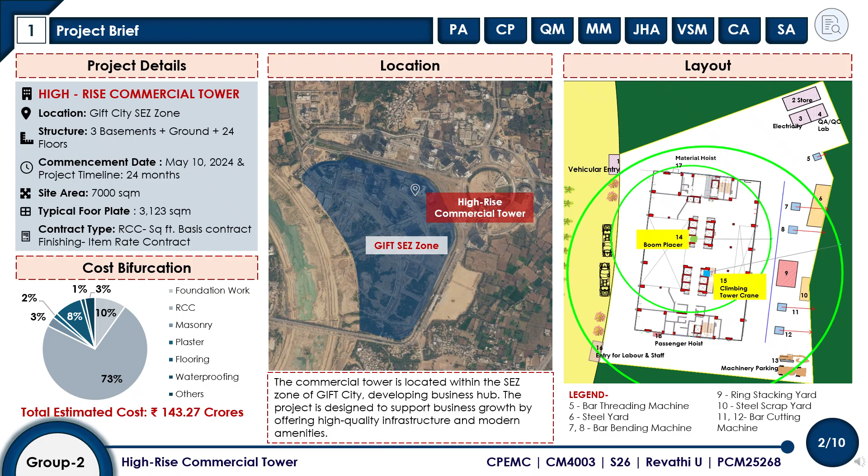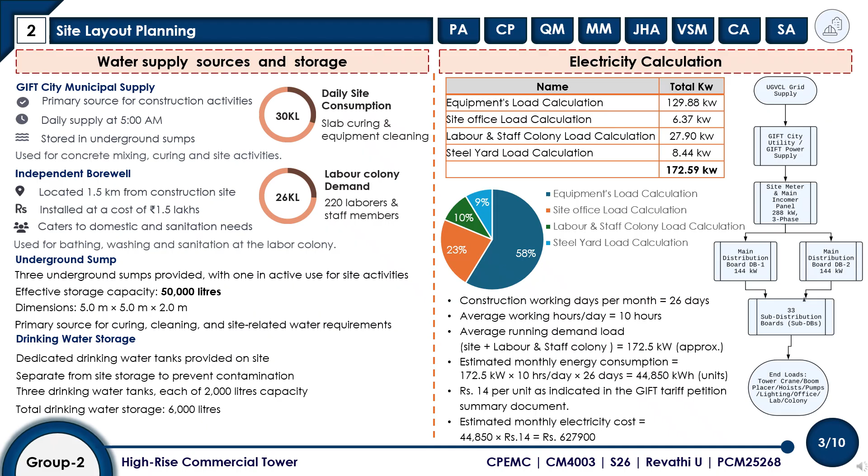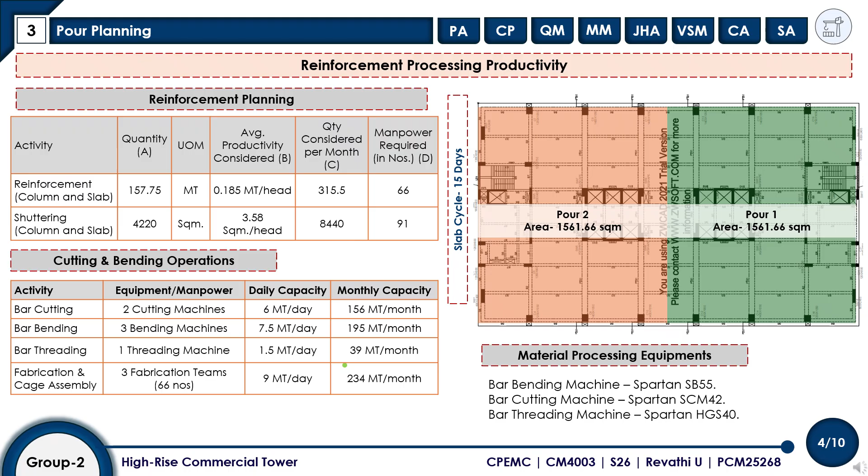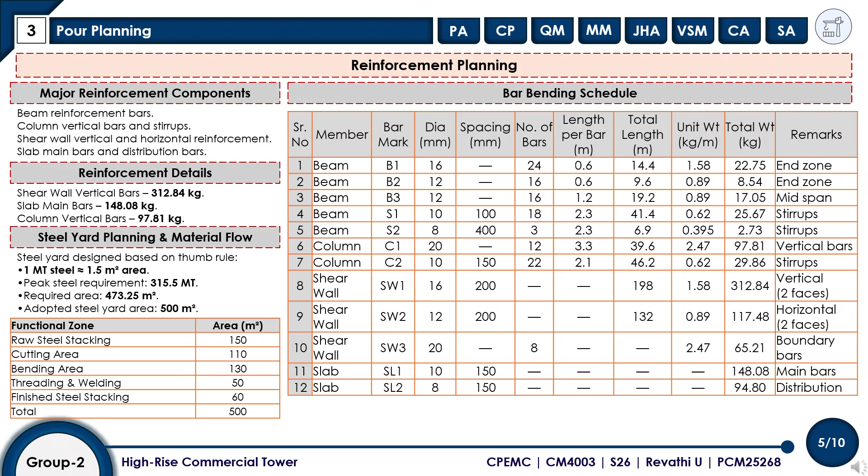A detailed bar bending schedule was also prepared to specify bar marks, diameters, spacing, lengths, and total weights of different structural members. Proper reinforcement planning minimizes material wastage, improves workflow continuity, and ensures smooth execution of RCC work.

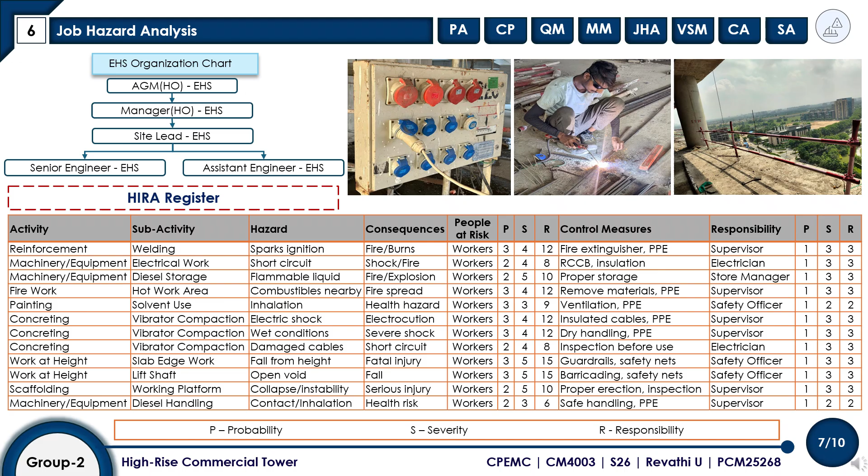For each hazard, suitable control measures were proposed such as PPE usage, fire extinguishers, RCCB protection, insulated cables, guardrails, safety nets, and proper inspection. An EHS organization structure was also established for effective safety monitoring that includes the AGM EHS, a site lead EHS, a senior EHS engineer and assistant EHS engineer. The HIRA study helps reduce accidents, improve work safety, and ensure safer environment and construction practices on site.

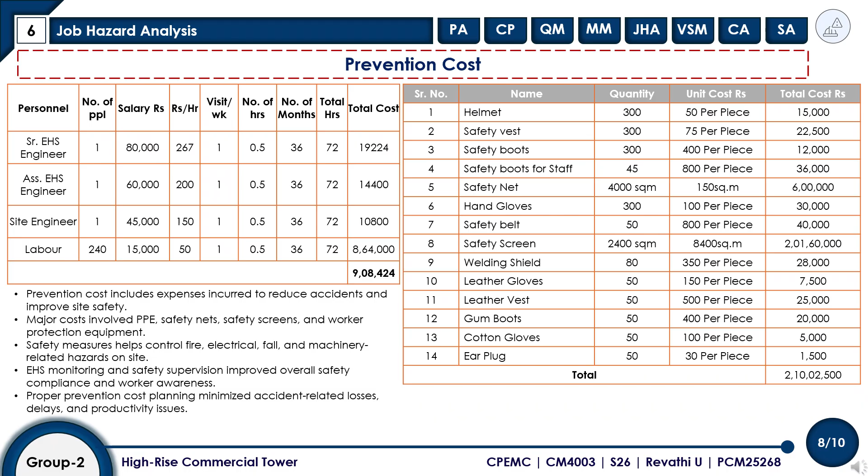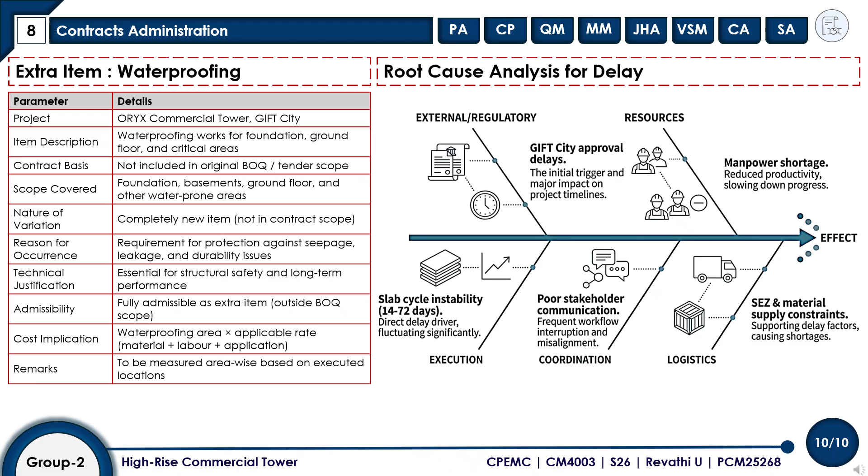The extra work was considered technically necessary and fully admissible under variation management procedures. The cost implication depends on the waterproofing area and applicable material and labor rates. Proper variation management helps in handling additional works effectively while maintaining contractual transparency and project quality.

To conclude, this project demonstrates the importance of integrated planning and management in high-rise construction projects. Through proper site layout planning, reinforcement coordination, material management, safety planning, and contract administration, the project achieves improved productivity, efficient resource utilization, and enhanced safety performance.

The study also highlights how systematic execution and monitoring practices contribute to smoother project delivery and better construction management. Overall, these planning and management techniques form an effective framework for successful execution of large-scale commercial construction projects.